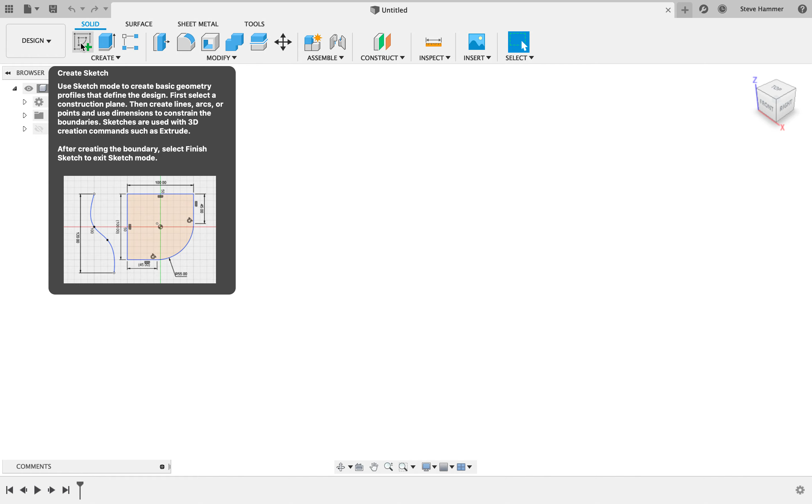This project is going to start off as a sketch, just like almost every single project in CAD should. So what I'm going to do is go up here to the top of the shelf in our design workspace, and grab my sketch tool. I prefer to do top-down working, so viewing from my top view here, and I'm going to start with a simple center-pointed circle.

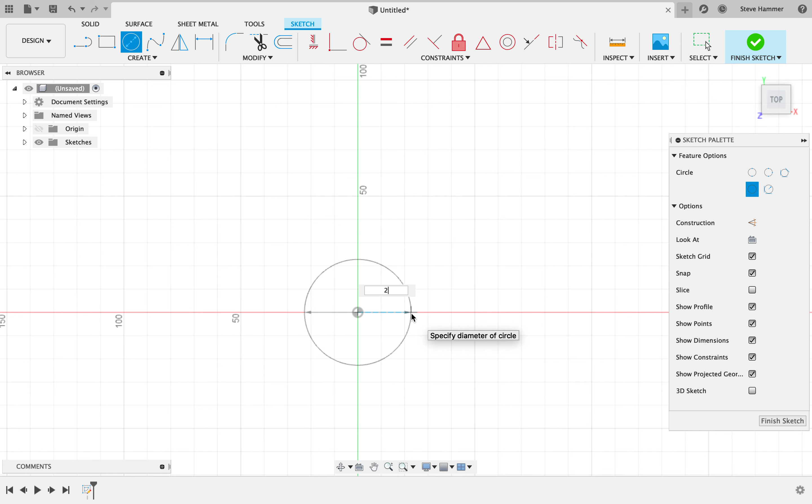Now I know that the diameter of my ring finger needs to be about 22 millimeters, so I can take 22 and hit return, and this is going to give me the inner diameter of my ring. If I were to extrude this right now, basically I would have just a solid billet of material, and that's not what I want.

So what I need to do is create the actual ring structure, because this is the inside of it, and we can't just take this and extrude it. We need something else here to extrude inside of - extrusions have to happen between shapes or between boundaries.

So you could come in and probably draw another circle in here, or you could tell this particular circle to offset itself. Underneath your modify tools, you have offset.

Now I have offset nested up here. I'm not sure if it's going to be nested on yours, but you'll notice that anytime you hover over top of something on your toolbar, you'll see three little dots. If you click on those three little dots, you can pin to toolbar, pin to shortcuts, or unpin it from the toolbar if it's not something you use frequently.

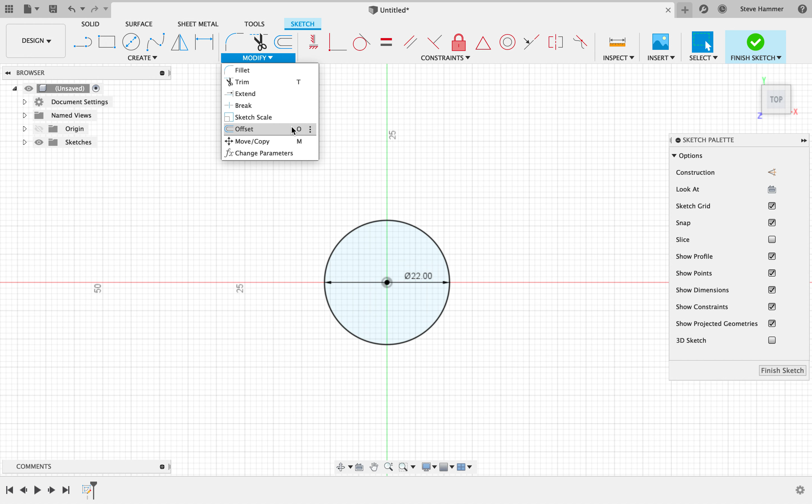Offset's keyboard shortcut is O, and I will oftentimes use the O keyboard command when I'm working. So in order to offset a sketch, we select that sketch, and then we tell it exactly how far we want to offset it from its original line.

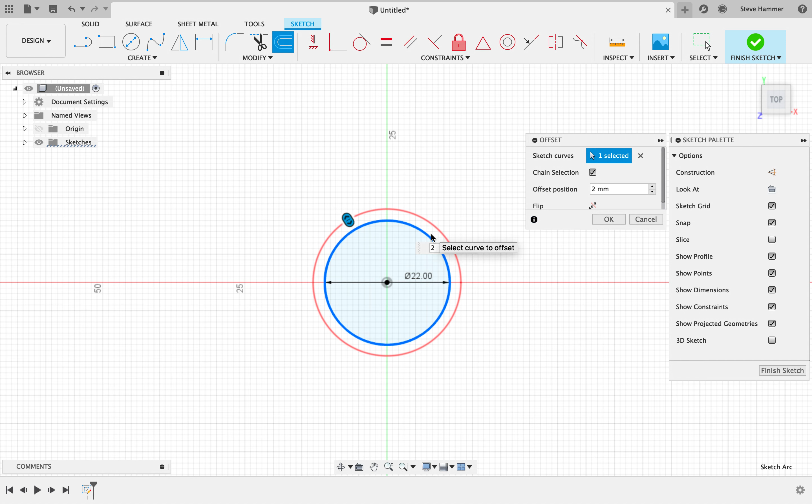I want this one to be 2 millimeters offset, and that means this is now a 26 millimeter diameter circle. If I click on this, you can see down here the radius is 13, so that means the diameter is 26, because we basically have 2 millimeters here plus 22 is 24, plus another 2 millimeters over here gives us 26. So this 2 millimeters is all the way around.

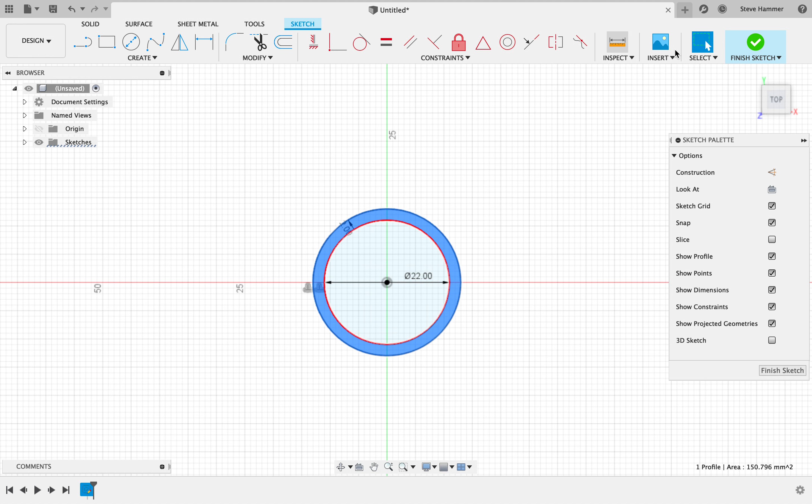Now you can come in and actually create the shape of your ring here. So we're going to select this outer area, the outer area of our ring, and we can go ahead and hit E on the keyboard.

E is our extrude tool. Notice it leaves the sketch environment and goes into our construction tools. We've basically just told it, without finishing sketch, that we're finished with that sketch by hitting the E key on the keyboard.

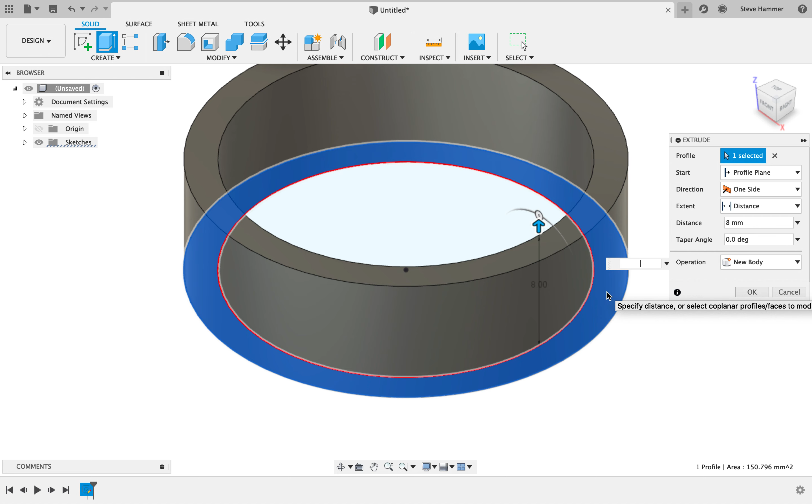Now I can drag this up and make it about 8 millimeters tall. If I double click over the 8 millimeters, I could say 8 millimeters. If I wanted this to be 1/4 inch, which is 0.25, I could type 0.25 IN, and that gets me to 1/4 inch in thickness. 1/4 inch and 8 millimeters are pretty close, not exactly the same, but I'm going to go with a 1/4 inch thick ring.

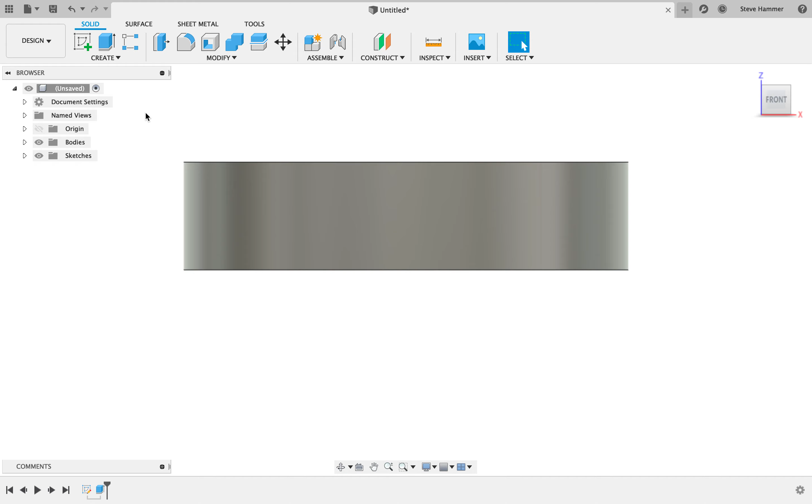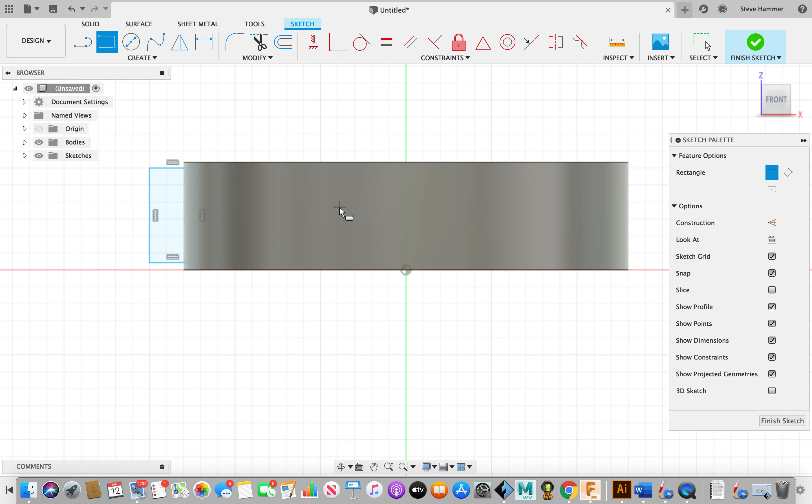If you want to add some details to this project, we can make some cuts in the side of the ring. In one of the videos I showed you how to do revolves. So if I grab my sketch tool and select this particular plane to work on, then my rectangle tool, I can come in here, hit that side button on my mouse, and draw just like this. Finish my sketch. This is where extrusions and creation commands get interesting, since this is overlapping my design here.

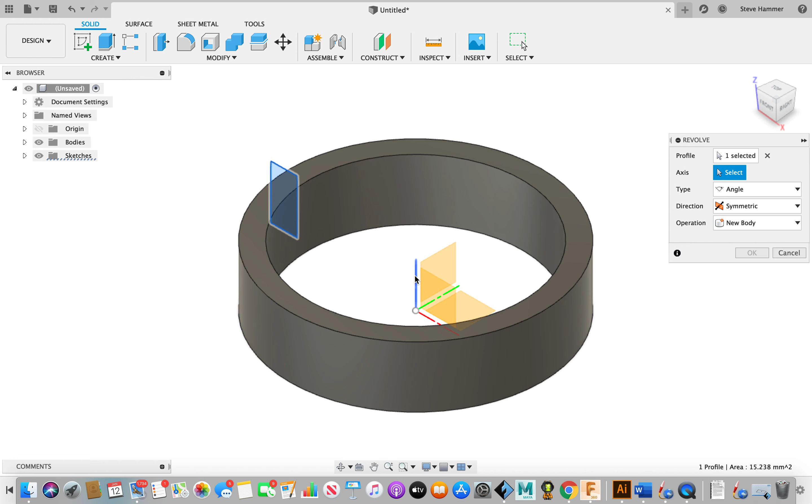So if I go to Create and Revolve, it's going to have this profile plane selected. Your axis can be one of these axes, this blue axis in the middle, or it can be a face or a round edge. So I'm just going to select this right here. You'll notice it's set to 90 degrees and symmetric from earlier in my demonstration, so it saved that.

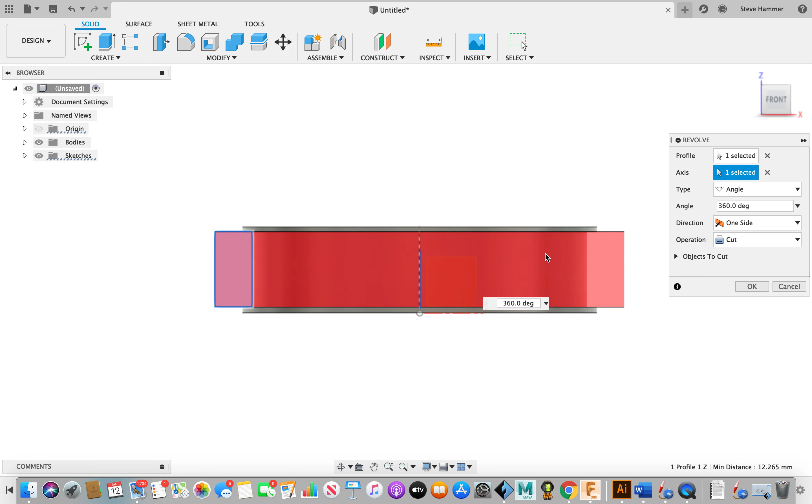I'm going to go ahead and set it to 360 degrees and one-sided. You can see how, instead of making a solid on my ring, it's actually coming through and cutting — that's what red denotes, that it's cutting through. So I'm going to hit OK, and there is our ring with a cut.

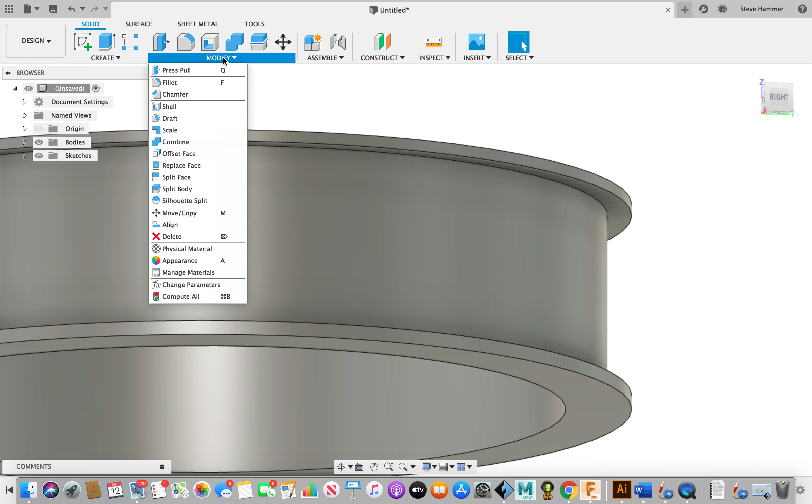One of the other things we might be able to do, since this is going to be 3D printed, is address this kind of surface right here, which is not good to 3D print because it's hanging over space. So I'm going to come in here and add some fillets to my design.

I'm going to select this edge as well and start dragging these out. So that's 0.75 millimeters, and I'll hit OK. Now that I've got some fillets here, it's going to create a nice curved surface up to this edge, and it's going to make 3D printing much, much easier. You'll have a lot fewer failures here.

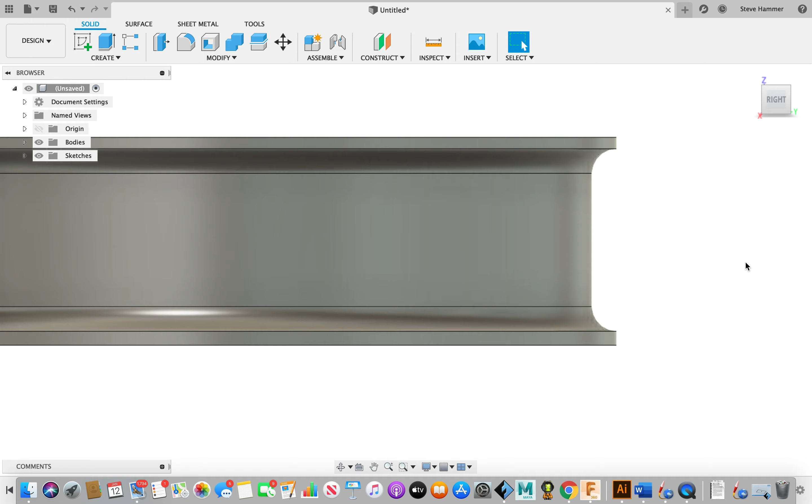So there is the basic ring. You don't have to add any styling to it — it can be just a plain cylinder, but that is a ring.

Now, in order to get your grade for this project, you're going to have to show me that this ring fits. You have to get it over your fattest knuckle and back against the palm of your hand, and it should come on and off your finger comfortably. If it gets stuck and we have to cut it off, we will remanufacture, and your grade will be assessed once you have a proper fitting ring for this project.

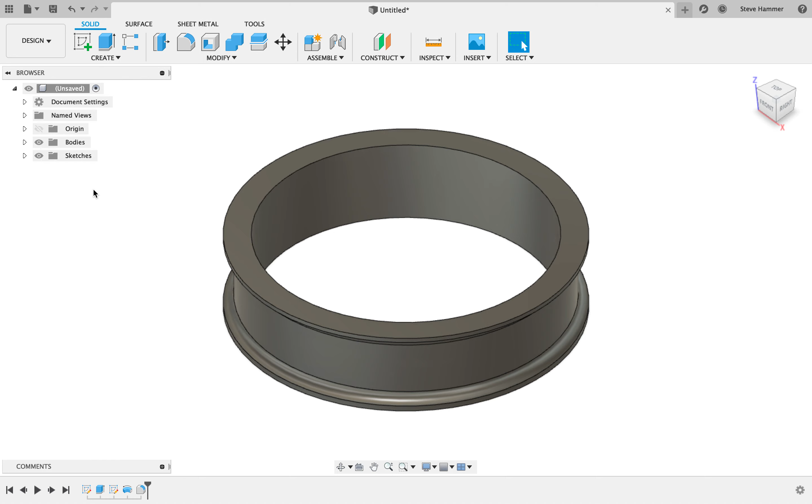Another thing you might do to make it fit a little better is to add some fillets to these internal edges, just some small ones here and here. It'll make it a little more comfortable to go over your finger.

So you'll print these out, guys. They take about 5 to 10 minutes to print on the 3D printer, and then you'll present it to me and get your grades.